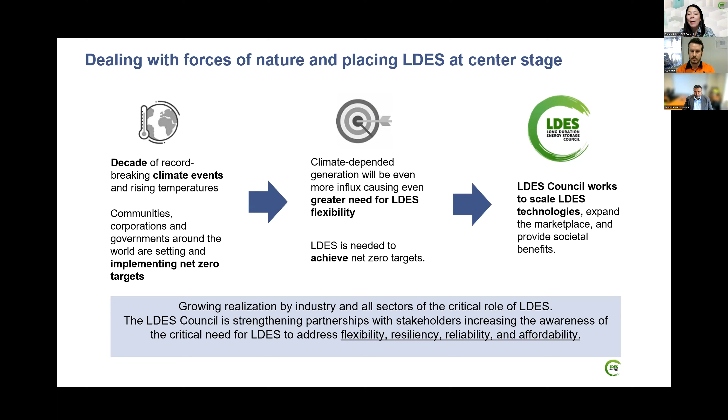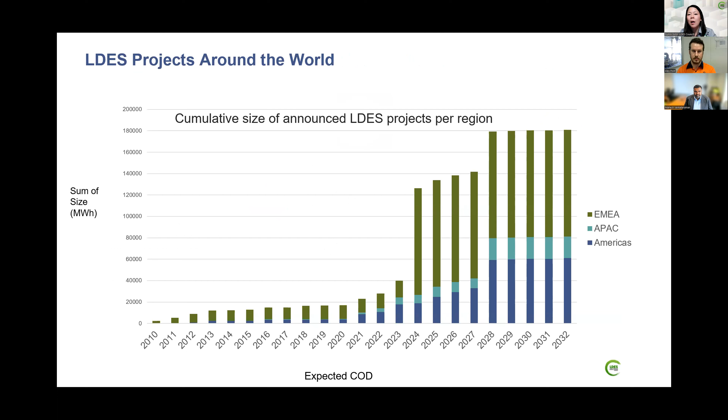We're seeing a decade plus of record-breaking climate events, and we see more and more communities, companies, and governments around the world implementing net zero targets. We recognize that to achieve these net zero targets, LDES will be crucial as a solution. LDES provides the flexibility, resiliency, reliability, and affordability. The LDES Council's member companies are dedicated to developing and scaling LDES technologies and expanding the marketplace, and we're seeing more and more projects come online. We're expecting to see an exponential growth of LDES projects being announced and coming online in the next couple of years. So really exciting.

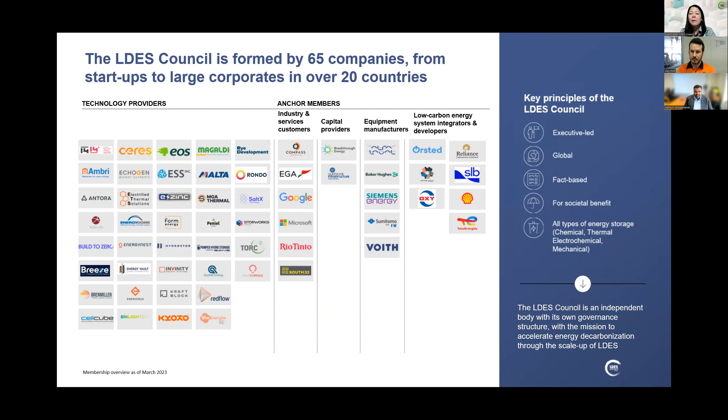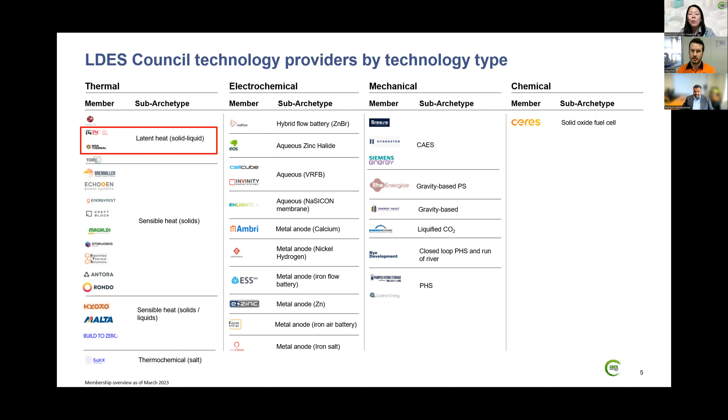Many of our member companies are part of this acceleration of the technology. The LDES Council consists of about 65 companies representing almost 25 countries. We have technology providers and anchor members representing the entire LDES ecosystem. We are technology neutral, and we recognize there are many different LDES technologies and solutions out there for many different applications — members doing thermal, electrochemical, mechanical, and chemical storage. Today you'll hear from two Australian companies providing thermal energy storage solutions.

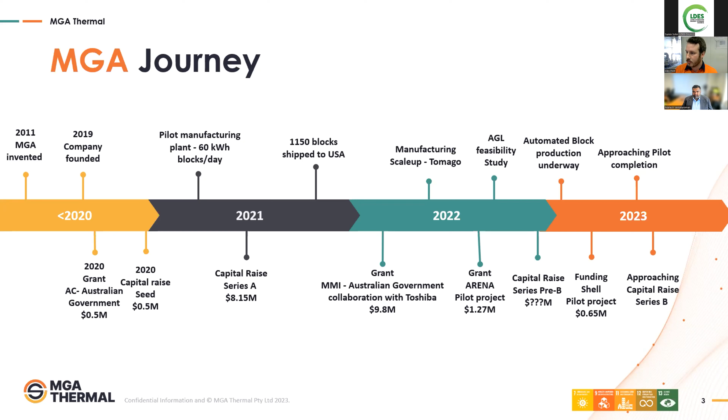So how do the materials work? Well, at its heart, they're a composite material. We make them out of two different components. The first is a solid matrix material, which forms the body of our blocks. Within that matrix, we have distributed grains of a phase change material, typically a metal, which in operation melts and freezes repeatedly, storing latent heat. That's our primary energy storage mechanism.

The idea is that we achieve the high energy density of the latent heat material without the complexity of handling a material when it's a solid and a liquid. Macroscopically, they're always solid blocks, because it's small individual discrete grains that are melting and freezing rather than the bulk of the material.

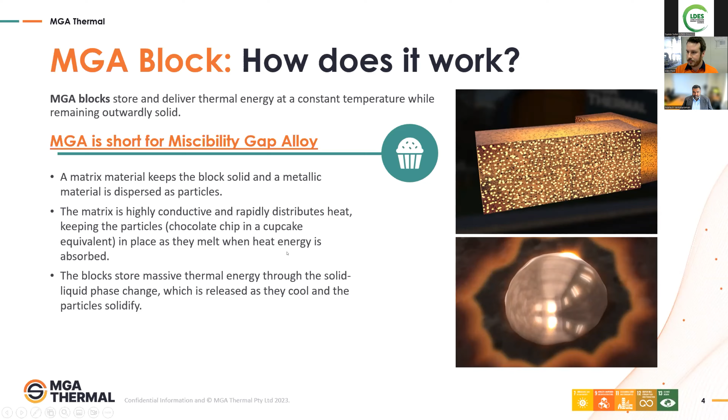It's always a trade-off between how much PCM to include in our blocks without compromising their mechanical properties. Obviously you want as much PCM in there as possible to increase energy storage capacity, but you don't want to overdo it. You need to maintain some sort of matrix structure.

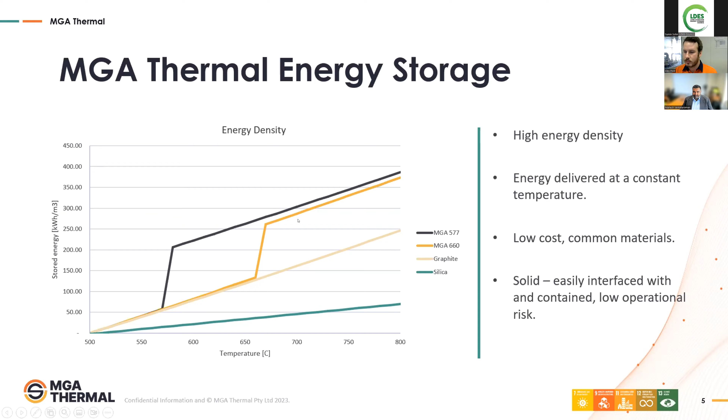We prioritize the use of sustainable materials in our blocks. These are materials that are potentially waste products from other industries, not only because they're typically low cost, but because they're sustainable. Our customers are particularly interested in decarbonizing their processes and hitting sustainability metrics, so having a product with a low CO2 footprint is very important to them.

We're continuously working to evaluate new materials, try them out in our own research labs, which are now in-house, and incorporate those into our products. We have quite a strong ongoing R&D focus within the company. We were lucky to inherit a lot of that from the university when we spun out, so we maintain that going forward. We're always looking at new materials to develop, especially as low carbon products hit the market, as other companies work on their decarbonisation.

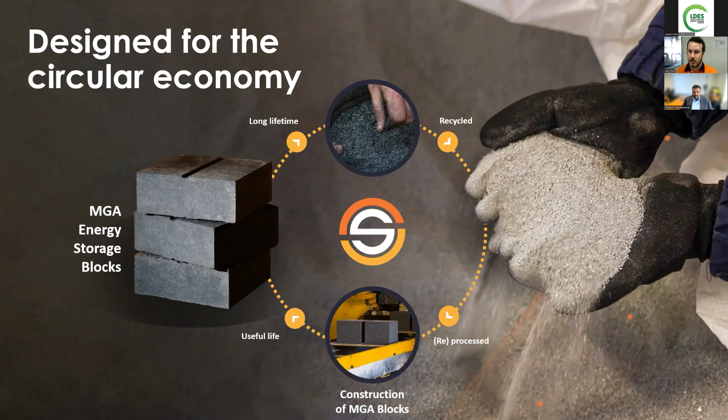The six key advantages we believe this composite material has allowed us to achieve are: a system that's renewable friendly — I'll get into this a bit, but we can interface our material with solar energy, wind energy, waste heat from industrial processes, a number of sustainable sources of energy. We have a high capacity because of the utilization of that latent heat.

Our material is economic because we're utilizing very prevalent materials and those that are waste feedstocks, so they're not expensive to make. The modularity allows us to stack them up into very large storage systems or go down quite small very easily. Sustainability I've covered, and safety.

Safety is an important issue to cover, especially with the use of phase change materials. Typically, if you have a very large volume encapsulated, then you risk rupture if there's any failure of your encapsulation mechanism.

Interestingly, if you look at our product, if a brick is to fracture in operation, you're not actually exposing a lot of molten material. You don't have a rupture. You expose a small number of one millimeter sized grains. So it is inherently safe.

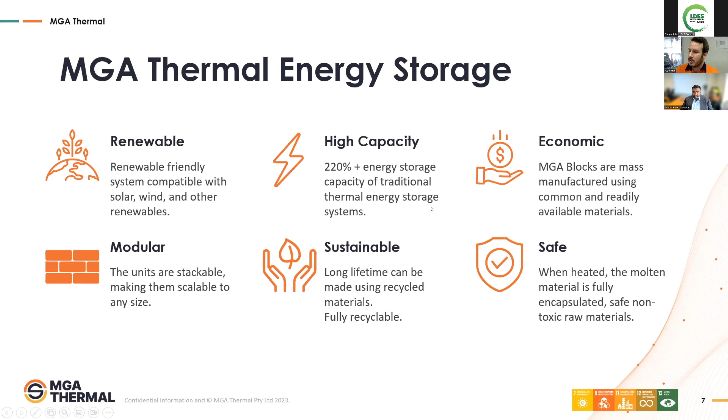Looking at our manufacturing here in Tomago, that 2021 process was a manually intensive pilot production line. We're now at the 1,000 block per day stage. Each block stores approximately a kilowatt hour of thermal energy, giving us about a megawatt hour per day of manufacturing capacity, which is enough for our current scale of projects, typically pilots and demonstrators.

In 2024, we're looking at bringing a manufacturing line doing 10,000 blocks per day, 10 megawatt hours. At 240 days per year of manufacture, that equates to 2.4 gigawatt hours per year of thermal storage capacity, and then continuing to scale up through 2026, 2028, eventually approaching 1 million blocks per day. So it is a large scale manufacturing operation.

However, we're utilizing a lot of technology already used in similar industries, which is based around very large volumes of modular blocks. It turns out humanity's been doing that for quite a long time, so with a bit of material science intervention, we've managed to repurpose a lot of those processes for our own use.

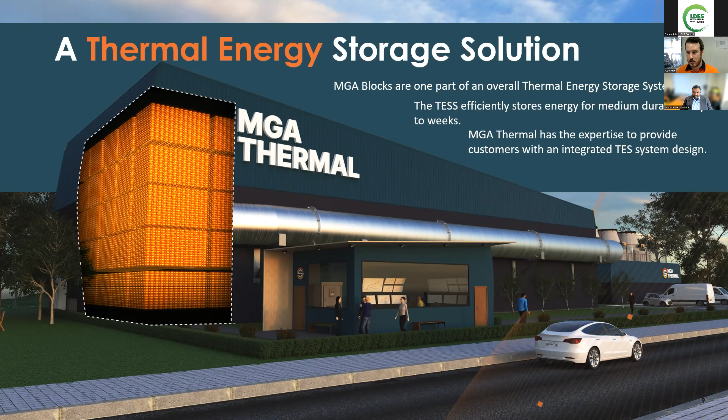So we charge electrically. It's using simple resistive heating to put energy into our blocks. We heat them up through the phase change. We can also accept waste heat from industry if it's at an appropriate temperature. And we discharge using an inert gas loop, which can then be connected directly to an industrial process, or it can be used to generate steam for either industrial use or for power generation.

Our core product utilizes aluminium as a phase change material, so 660 degrees Celsius melting temperature, which is very convenient for making steam for a range of industrial processes, but also for power generation.

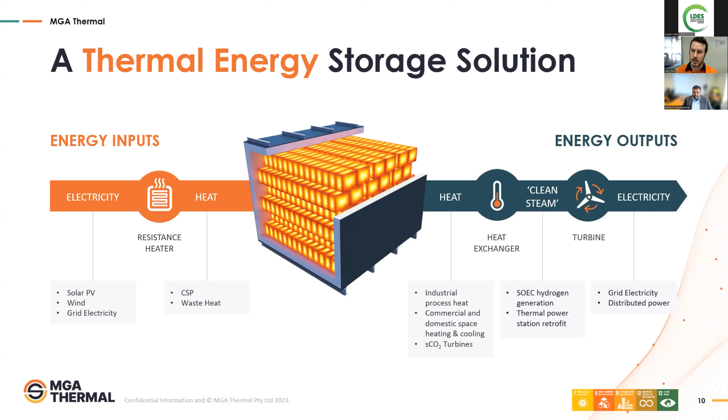So onto the project side of things. We have a demonstrator project nearing completion. I don't know if you can see it, but it's actually outside my office window in the background. So we expect that to be beginning commissioning very, very shortly. It's been funded by the Australian federal government through ARENA, and also with the help of Shell through the Game Changer program.

And really the goal of that pilot is to demonstrate the complete use of our technology. So even though we're conducting it in-house, it's essentially ready to be a commercial unit. It's charged up using 0.5 megawatt of electricity, which currently is over the grid, but will very shortly actually be coming from a rooftop solar system on the roof of our factory. It stores 5 megawatt hours of thermal energy, and then it discharges, in this case, to moderate temperature steam at 385 Celsius 40 bar. And we can discharge that at capacity for a 10-hour period.

So that gives us our 5 megawatt hours of storage capacity, and that corresponds to about 3,700 of our blocks. So it's about 4 days of manufacture for us to populate this unit.

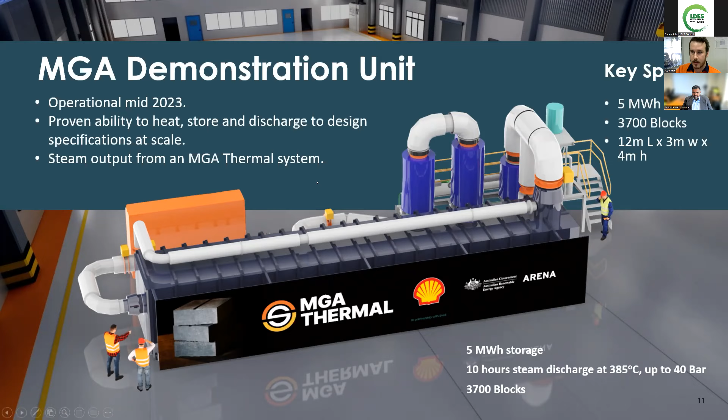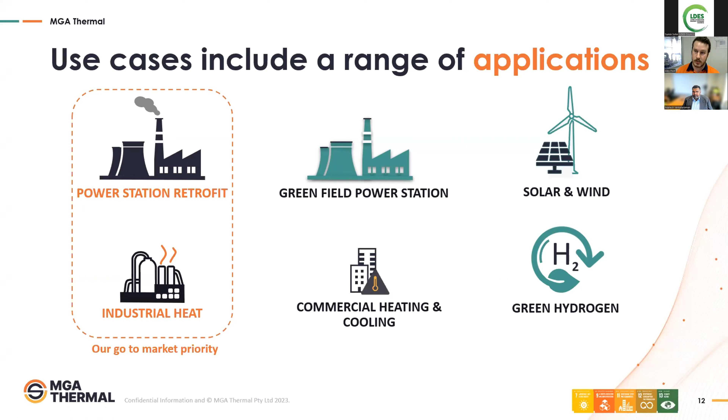So the use cases that we're really focused on are the industrial process heat and the retrofit of thermal power stations. So the utilization of steam at temperatures up to 550, 600 degrees tie in very nicely with these two use cases.

I probably won't delve into this in the interest of time, but we have recently completed a bit of a market study on a lot of the different industrial process heat uses out there. We believe that about 2/3 of the market is reliant on steam at temperatures up to about 600 degrees, and that includes power generation as well.

So that is our core focus at the moment. We intend to target those use cases that need a very, very stable, long duration supply of steam, whether it's running a power station or powering an industrial process.

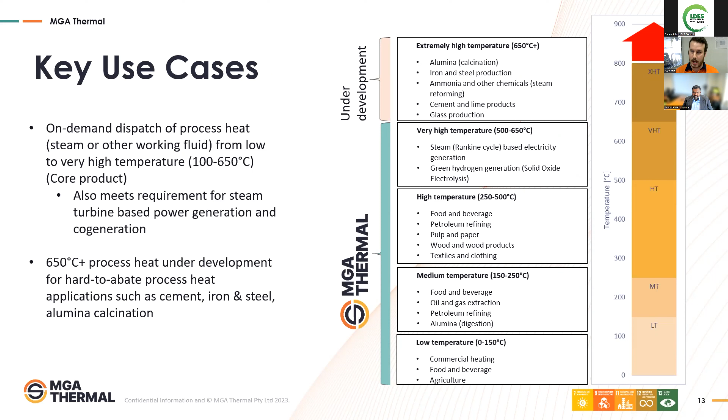All right, so pretty fast paced there, but that was the content that I had. So I hope everyone found it useful.

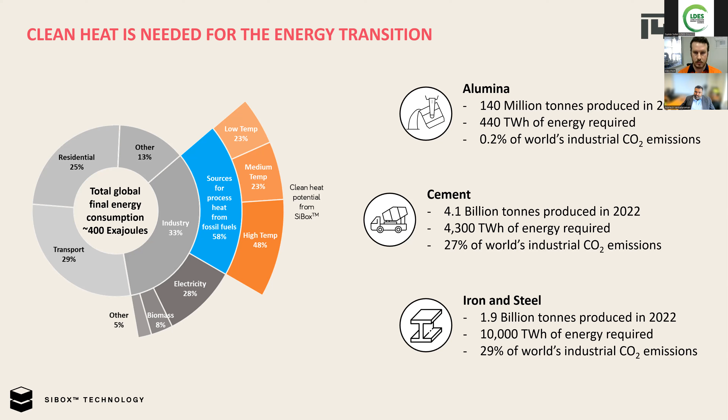So if I were to go and devise an alternative, a green heat alternative for these industries, what are the criteria I might look at? Very high level, you want this to be a modular, scalable technology, which can go up to a gigawatt hour scale. A typical alumina or cement plant, you're looking at tens of megawatts per reactor in terms of heat supply. So you need a very large storage to be able to cater to these industries.

And secondly, you want the ultra high temperature capability. Now, Alex mentioned that about 50-60% of these industries use heat at lower temperatures, but there's also a lot of alternatives at those temperatures. So for very low temperatures, you go with a heat pump sort of solution.

For medium temperature range, there are many sensible storage options. But when it comes to the ultra high temperature space, there aren't many alternatives out there, even in the thermal storage arena. You also want robust 24/7 operation, which is very important for these industrial operations. They like to run industrial reactors 24/7, and they do not like to go cold once they're hot. So maintaining the temperature profiles and gradients 24/7 is a key requirement.

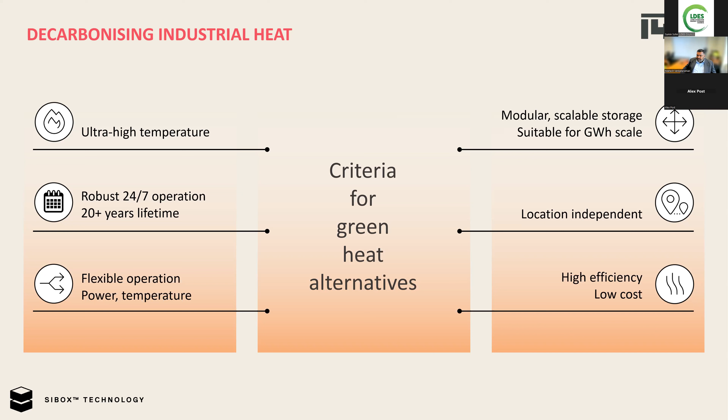That's where the hero of today's story comes into the picture, this 14D brick. Unfortunately, I don't have a name for this yet. We haven't named the brick. We have a social media competition going on for naming it. I'm personally in favor of Bricky McBrickface. This 14D brick is our building block for our thermal storage technology.

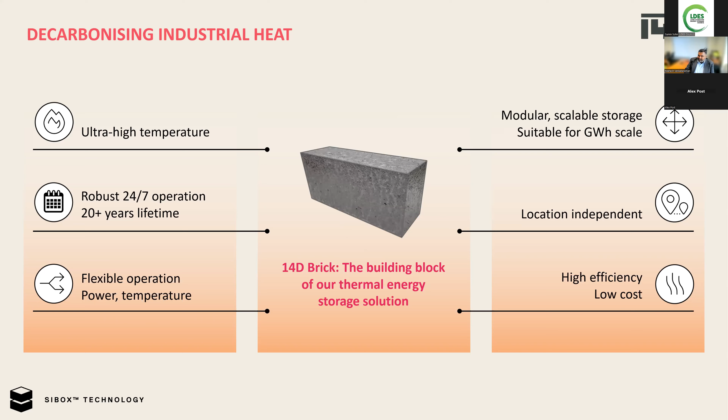So how does it store the heat is a very important question. Alex did mention the challenges in terms of the material science aspect of it.

Now there are three variables here. One is the phase change material used inside the brick, which is a silicon-based alloy. Then you have the matrix material, and then the environment in which this is operating, which could be air, combustion environment, etc. You have to minimize or eliminate the interaction between all three of these, so the containment shouldn't be reacting with the metal, the metal shouldn't be exposed to the atmosphere, and the atmosphere shouldn't be damaging the containment material itself.

So we've managed to solve all of those things in this 14D brick, which is in a form factor that can be mass produced and manufactured in existing facilities around the world.

Now the metal that we use is a silicon-based alloy. Silicon has one of the highest energy densities in terms of its latent capacity. The only other element you'd think of is boron, but using boron is very, very hard in this context. So what we've done is added some herbs and spices to the pure silicon, and that's what the SiBrick storage media looks like in terms of its energy storage profile.

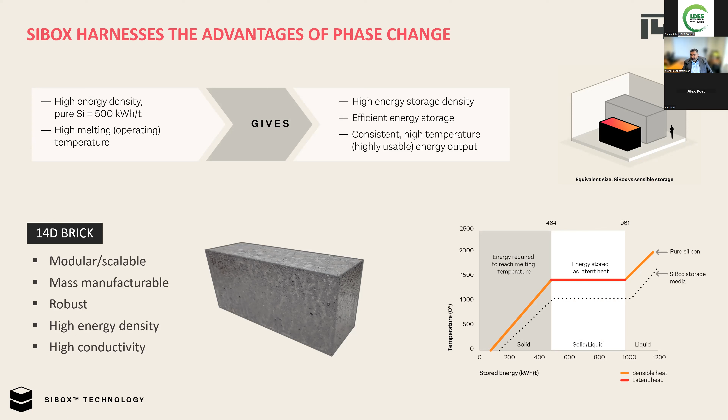So just to give you an idea of scale, here I have the SiBrick storage media compared to a sensible storage media of equivalent outlet temperature, and it's about 2 to 3 times lower.

More quantitatively, if you compare it with other phase change and sensible storage material alternatives, like steel, oxide-based material like silica or alumina, conventional nitrate-based molten salts, graphite, and aluminium, you can see that the SiBrick or 14D brick can store a lot more energy, up to 2 to 3 times compared to some alternatives. The red shaded portion here is the latent phase. About 60 to 65% of our energy comes from the melting and solidification of the metal, and the remainder is due to the temperature swing in the storage block itself.

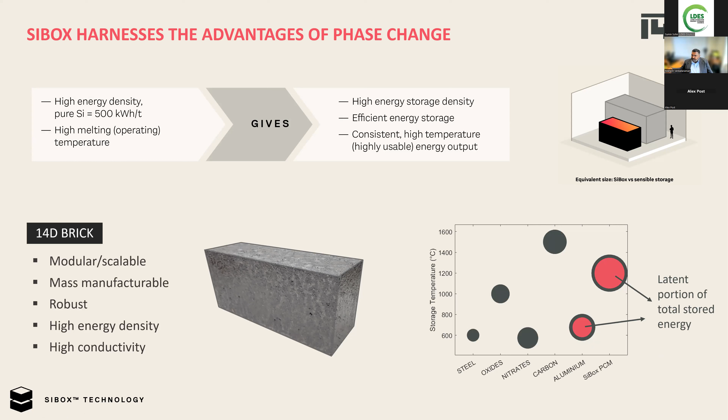Now, where can this brick be used? There are multiple configurations you can use this brick in. The simplest would be as a hot gas generator. You can stack these bricks up in a certain arrangement, heat them using resistive heating elements, and then use a heat transfer fluid to extract that energy when needed. That is the configuration we've built in our workshop here in the demonstration module. I'll talk about that a bit more later on.

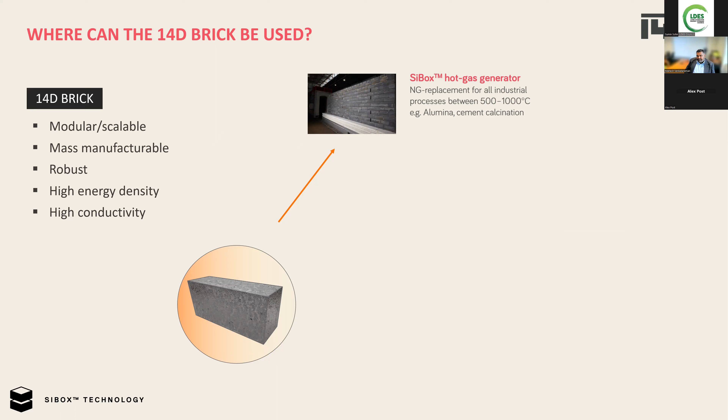The hot gas generator can act as a replacement for natural gas in a lot of high temperature industries like alumina and cement. There were some questions in the chat about the cement and alumina industry as well. So the phase change material we currently use melts at about 1100 degrees or so, so you can go up to 1000 degrees in terms of the outlet temperature from the demonstration module.

The next generation electric reactors is another opportunity. A lot of these industries are looking to electrify their operations with the assumption that in the very near future, a large portion of the electrical grid will be decarbonized, and converting to electric reactors can reduce the carbon footprint of their products. Having a high energy dense material directly integrated with the reactor gives you the opportunity to design electric reactors which have inbuilt storage in there.

You can also use these bricks directly for waste heat utilization. For some industries like glass, where you have regenerative furnaces, there is fuel port switching every few minutes or so. One of the key constraints for these furnaces is to maintain a constant temperature profile inside the furnace, and having a phase change material in there at a very high temperature would give you the opportunity to minimize those fluctuations.

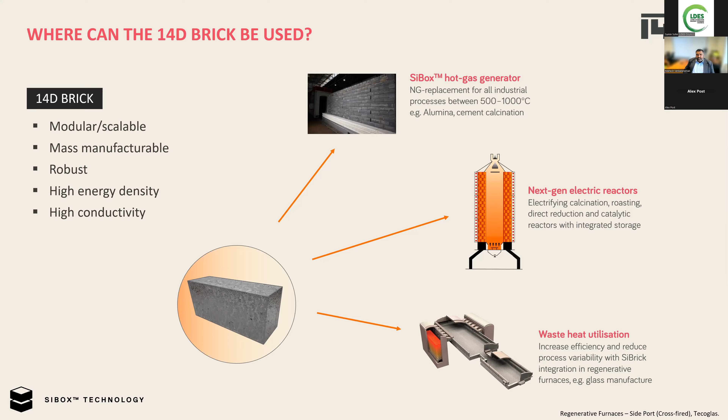Talking a bit more about the demonstration module, which we are currently commissioning - the construction was completed about a month ago, and we're undergoing commissioning right now, doing the fine-tuning. It's a very simple configuration, as I mentioned earlier. You have electrical resistance heaters in there, which can convert energy from renewable sources and store it as heat in the bricks. Then there is a heat transfer loop inside, which captures that energy and supplies it to a process 24/7.

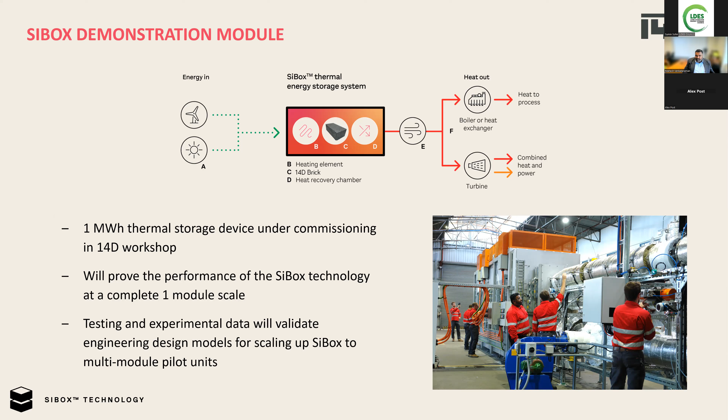This SiBox demonstration module is at a 1 MWh scale, and it's a modular design. What we're aiming to do is demonstrate the performance at a 1 module scale, and then that can be replicated in larger builds. The testing and experimental data from this will validate all of our engineering design models and help us scale up the SiBox technology for multi-module units in the future.

A key feature which distinguishes our storage system from a lot of the others is the capability to do simultaneous charge and discharge in the system. By virtue of storing heat at very high temperatures, you can have a fixed temperature outlet at a constant power rate from the box. That's something we want to demonstrate through our module as well.

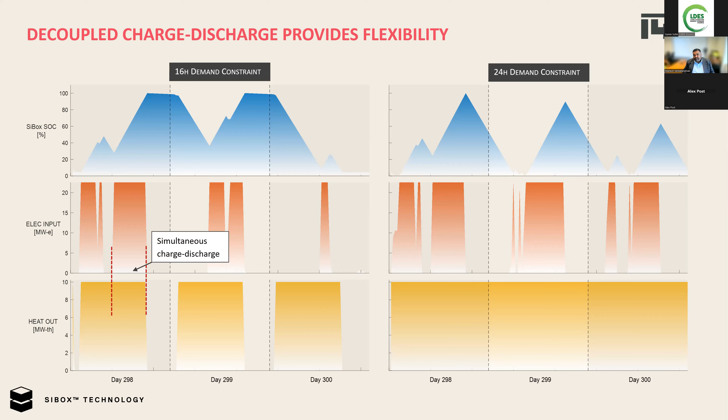In terms of application, we've been in discussions with a lot of these end users on understanding their actual process requirements. From a very static flow sheet perspective, it is quite easy to integrate, but there are actual practical challenges in these plant integrations, and that's what we're trying to solve in conjunction with some of these industries directly.

The alumina case is around two different heat needs. One is for the Bayer calcination process, where you need to provide heat to the main furnace at about 950 to 1,000 degrees, or maintain the furnace temperature at 950 to 1,000 degrees Celsius. The opportunity for SiBox to integrate in such a process comes from air preheating, and also preheating some of their feedstock, which is gibbsite, so when it goes into the main furnace, it is already hot instead of what they currently use. This has multiple advantages, not just in terms of reducing the fuel rate in the calciners, but also in terms of increasing the productivity of the plant as such.

And the second use case is around steam raising. Now, steam raising is not specific to the aluminum industry.

You could use that for power plants as well. The key advantage our system has is our discharge temperature is actually quite high, and you could use the existing infrastructure, the boilers designed for coal or natural gas firing, and still maintain the temperature profile you were getting with fossil fuels. It'll be a direct replacement for those fossils into the steam raising circuit.

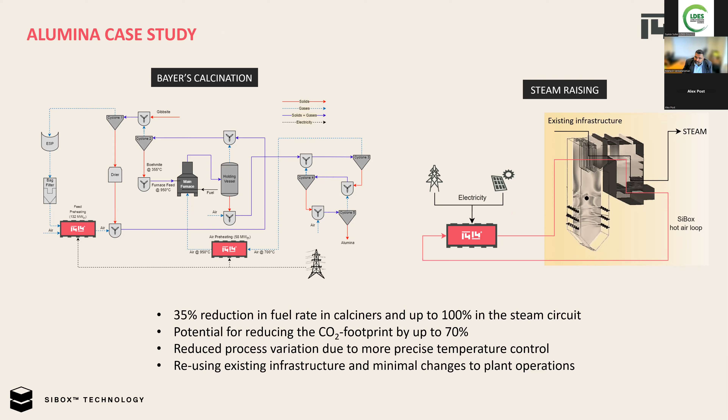In fact, University of Adelaide, who are part of the HILT CRC, have done this analysis independently as well, and they've come up with even higher numbers for the fossil fuel replacement in the calciner using thermal storage at high enough temperatures. The other industry we're targeting is cement production.

Again, a very high temperature industry where roughly 20 to 30% of their CO2 emissions is fuel related. The remainder is process emission, which comes from calcining of the carbonates. In this process as well, you can integrate a SiBox in a retrofit configuration and decrease the fuel rate by up to 8%, reducing the CO2 and NOx emissions from the calciners.

Another interesting feature is that when you reduce that NOx emission intensity, the ammonia use, etc., for catalytically disrupting the NOx emission also goes down. So it has operational advantages to integrating with the thermal storage.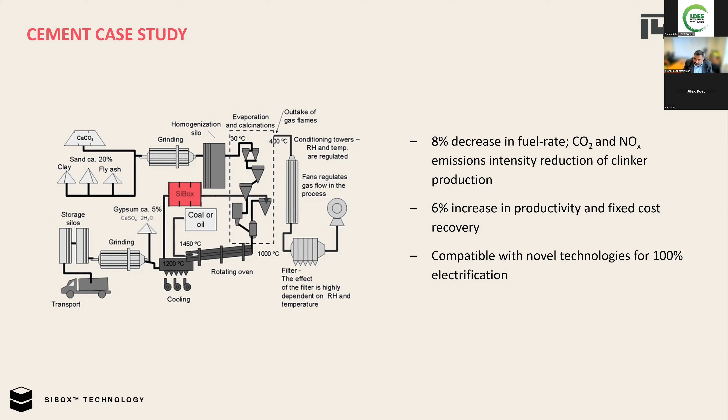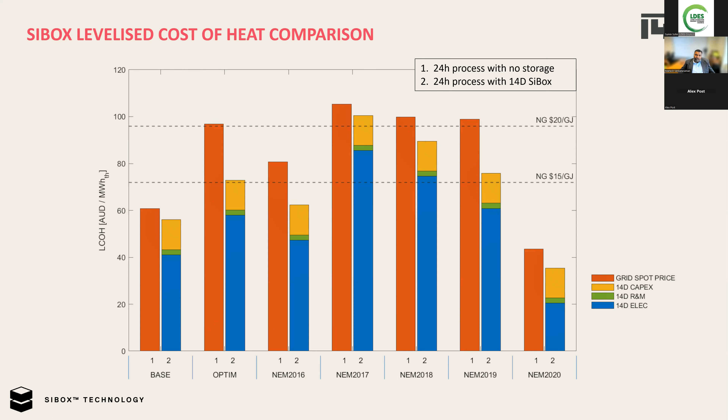In all cases, you can see that you can reduce the levelized cost of heat, just comparing on an energy cost basis, by up to 15 to 20% in all of these cases.

Another interesting thing is that with the recent increase in fossil fuel prices globally, the cost of natural gas is so high that the SiBox can actually be competitive much earlier than anticipated. In fact, in certain countries, including Japan, Europe, and UK, the current price of SiBox is actually lower than what the natural gas prices would be.

But as we all know, cost is just one incentive. These gas supply constraints are likely to continue in the future, from an energy security perspective and also emissions reduction purposes. This is what will drive the change and a switch towards a thermal storage sort of system.

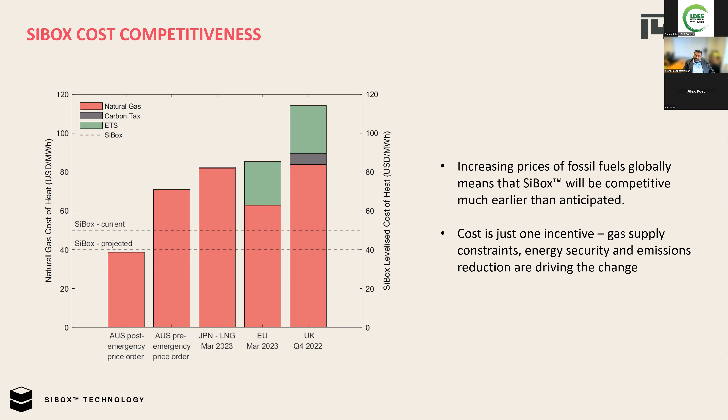In terms of our pathway for commercialization, that has been our journey over the last few years. The original test system was fairly high cost, and over the last 3 years we've designed a new storage media, updated the internal arrangement, understood the constraints around heat transfer much better, and done the insulation design, etc. So here is our current cost.

In future we want to be able to get much below this natural gas as fuel price. This price was from 2 years ago, so natural gas prices currently would be much higher than that, even in Australia. So our cost reduction pathway is based on continual R&D.

We keep working on new materials every day. We have a separate stream of R&D looking at different temperature phase change materials, which are compatible with our storage concept, specially tailored for different industries, and then standardizing the module design and the technology scale up, which provides a smooth pathway for building larger units.

Over the last year, we've also been working with one of the largest European refractory manufacturers for scaling up our technology. Initially, our products were using a casting method, which was a lot more manual and labor intensive. Over the last 12 months, we've changed that recipe and made it compatible with a press product — about 1 trillion or so refractory bricks are made every year.

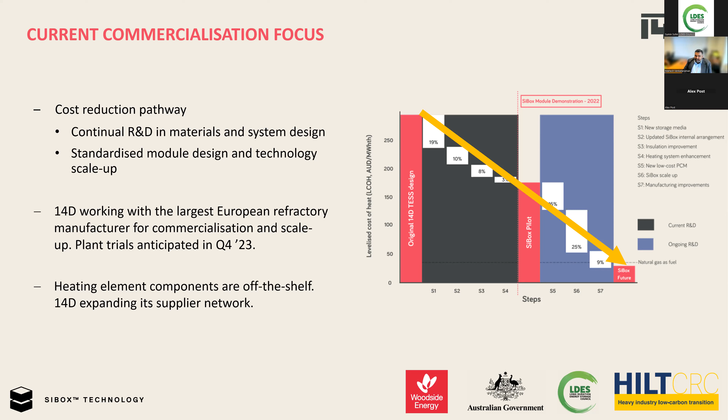So that's my last slide. In the last 3-4 years, we worked on doing the brick development, which is the core of our technology. Last year, we built this module, completed in January 2023. This year will be dedicated to testing this demonstration module. In the next years, we will be trying to scale up to a commercial pilot and gigawatt-hour systems within the next two years.

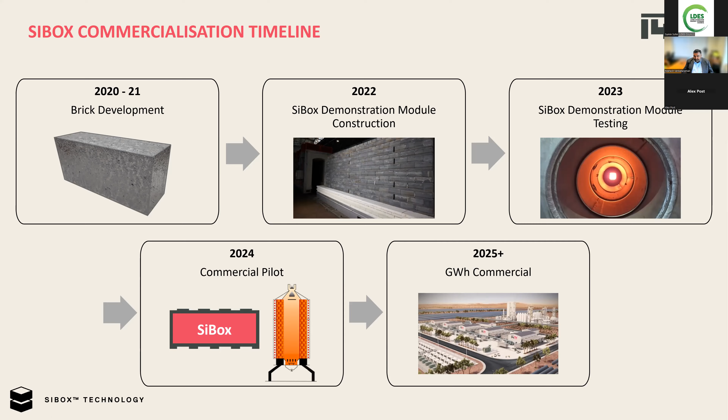Thank you very much.